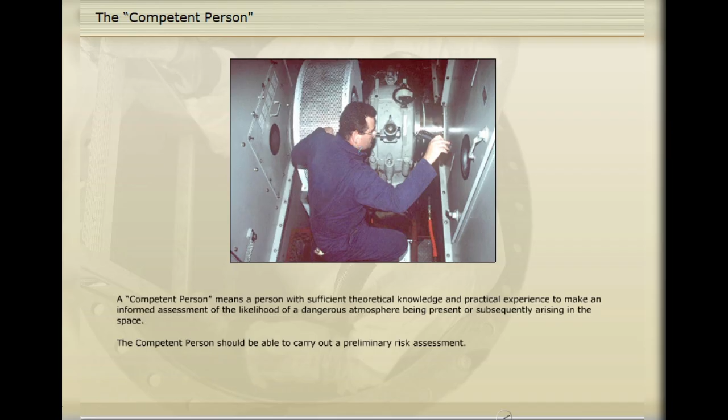The IMO also say that competent and responsible persons should be trained in enclosed space hazard recognition, evaluation, measurement, control, and elimination. The competent person should have both theoretical knowledge and practical understanding of the hazards that might be encountered, in order to be able to assess their likelihood and potential impact, and to define the precautions that will be necessary.

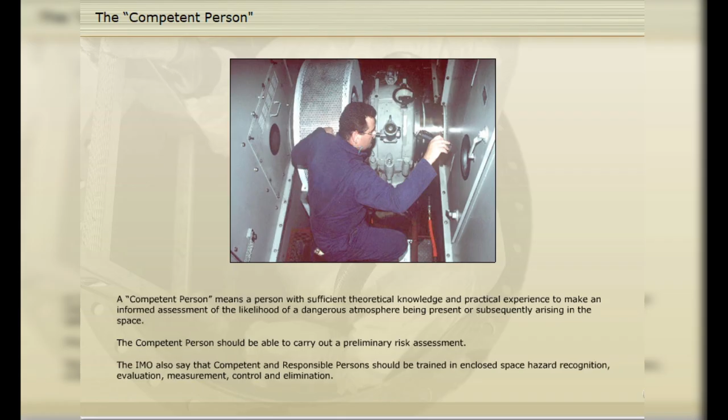With regard to enclosed spaces, the IMO define a responsible person as a person authorized to permit entry into an enclosed space, and having sufficient knowledge of the procedures to be established and complied with on board in order to ensure that the space is safe for entry. The responsible person may be the same individual as the competent person, or may be another person specifically appointed to the task.

The competent person and the responsible person will usually be drawn from ship's personnel, but may, under certain circumstances, be appointed from shore. Superintendents, safety inspectors, dockyard managers, and repair specialists may all assume such duties, and in these cases it is essential that all personnel involved are aware of the identity of the responsible person in particular.

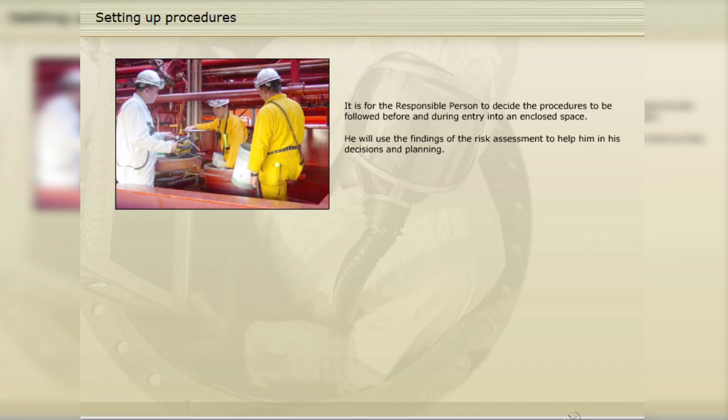It is for the responsible person to decide the procedures to be followed before and during entry into an enclosed space. He will use the findings of the risk assessment to help him in his decisions and planning. The exact procedures will depend on whether the assessment shows there is minimal risk to the life or health of a person entering the space then or at any time in the future; there is no immediate risk to health and life, but a risk could arise during the course of work in the space; or the risk to life or health is significant or immediate.

Click on the risk situation for more information.

Where the assessment shows that there is minimal risk to the life or health of a person entering the space, then routine safety and documentation procedures will be followed.

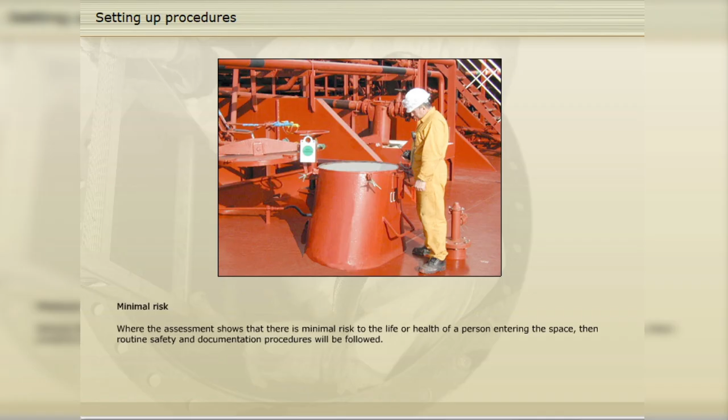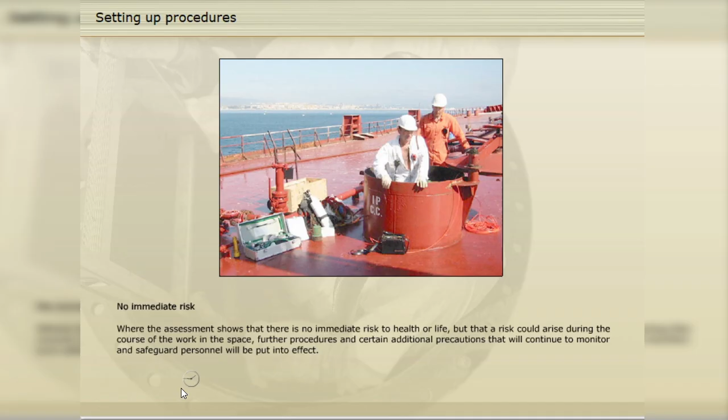Where the assessment shows that there is no immediate risk to health or life, but that a risk could arise during the course of the work in the space, further procedures and certain additional precautions that will continue to monitor and safeguard personnel will be put into effect.

The competent person and the responsible person: small vessels or those with small crew complements may not have the resources to designate either the competent person or the responsible person. In such cases, these positions will normally be filled from shore. In these circumstances, no entry into a potentially dangerous space should be made until a suitably qualified person is available to fill each role.

The 12,573 gross registered tons U.S. flag tanker William T. Steele was preparing to load a cargo of benzene at Guayanilla, Puerto Rico. Unfortunately, due to a planning oversight in the manifold rigging, the cargo was inadvertently loaded into the wrong tank, number 9 centre, which had been reserved for a cargo of xylene.

There was no chance of working with the wrong stowage, so the benzene was transferred out, and number 9 centre was washed and ventilated. Two crewmen entered the forward end of number 9 centre to insert an isolation blank in a flange in a pipeline, and the chief officer went to the after part of the tank to eject water from the sump area. The two crewmen working forward were unaware of the presence of the chief officer. When the flanges in the line were cracked, benzene began to leak out, and the fumes forced the two crewmen to leave the compartment without completing their task.

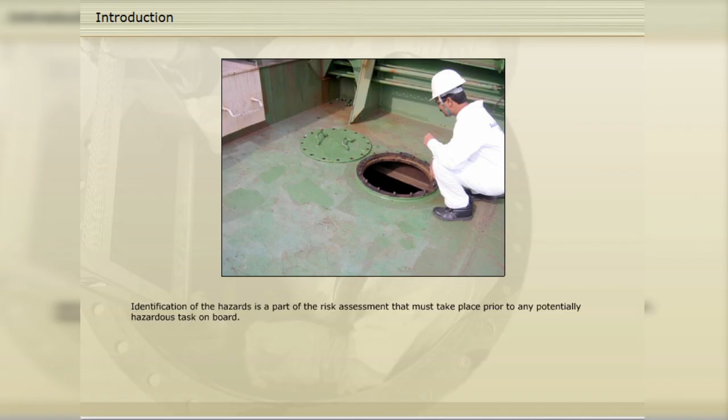Is a part of the risk assessment that must take place prior to any potentially hazardous task on board. The risk assessment should seek to establish the hazards that are or will be present at the work location, and then identify the significant risks arising out of the activity.

For each potential danger, the competent person must assess the likelihood of its occurrence and the severity of harm should it occur. Those at risk should be identified, as should the way in which they are at risk. A calculated judgment of whether the risk is tolerable is required. Consideration should be given to the effectiveness of existing controls and whether they need modifying or supplementing.

The principal hazard associated with an enclosed space, as we have already established, is the atmosphere inside. We will first examine various elements that may be present within that atmosphere and the specific hazards they present to anyone entering the space. Then look at additional hazards that may have a significant bearing on the task to be carried out.

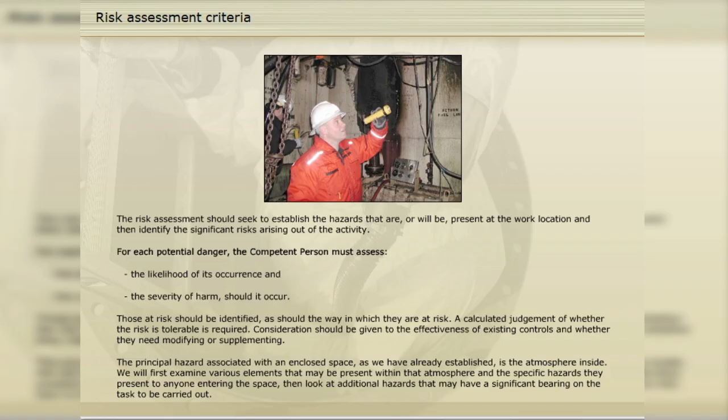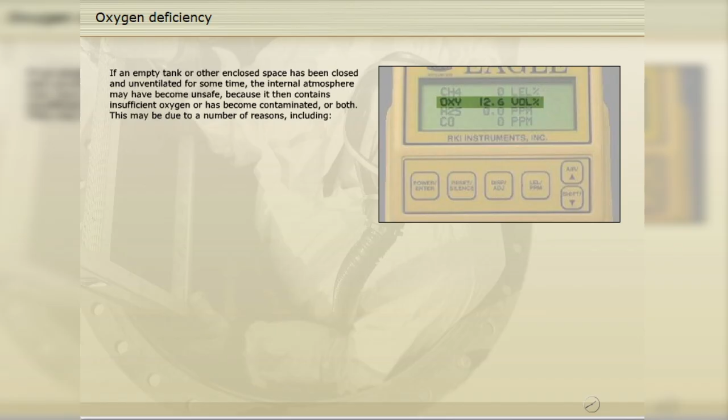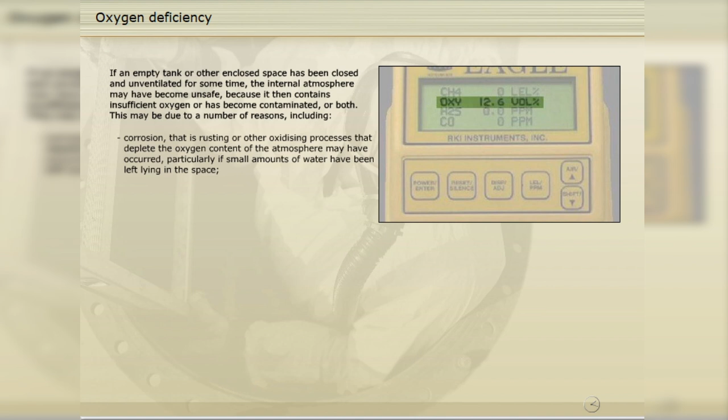If an empty tank or other enclosed space has been closed and unventilated for some time, the internal atmosphere may have become unsafe, because it then contains insufficient oxygen, or has become contaminated, or both. This may be due to a number of reasons, including corrosion, that is, rusting or other oxidizing processes that deplete the oxygen content of the atmosphere, particularly if small amounts of water have been left lying in the space. Oxygen-absorbing chemicals may have been present. Oxygen-absorbing cargoes may have been carried.

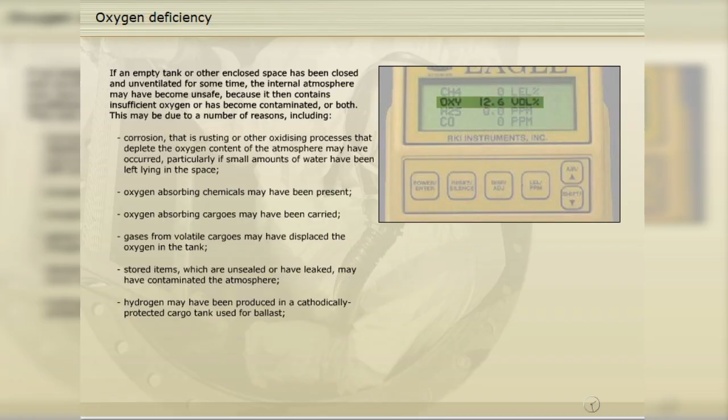Gases from volatile cargoes may have displaced the oxygen in the tank. Stored items, which are unsealed or have leaked, may have contaminated the atmosphere. Hydrogen may have been produced in a cathodically protected cargo tank used for ballast. Oxygen may have been displaced by the use of carbon dioxide or other fire-extinguishing agent. Inert gas may have been introduced into the space.

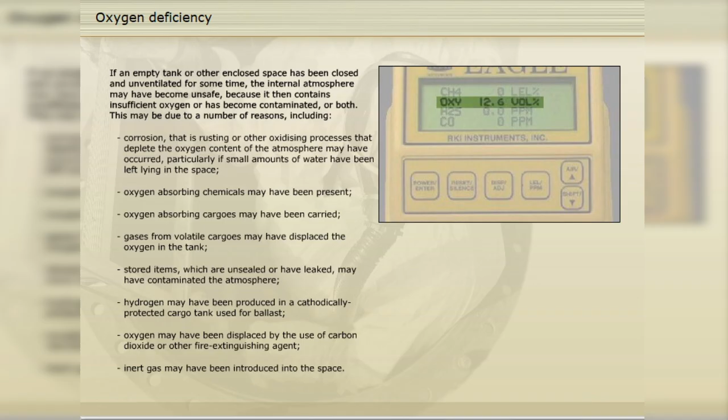It is not just oil, however, that presents a toxicity risk. Other vessels may be similarly exposed, due to the nature of their trade. Click on the labels for more information.

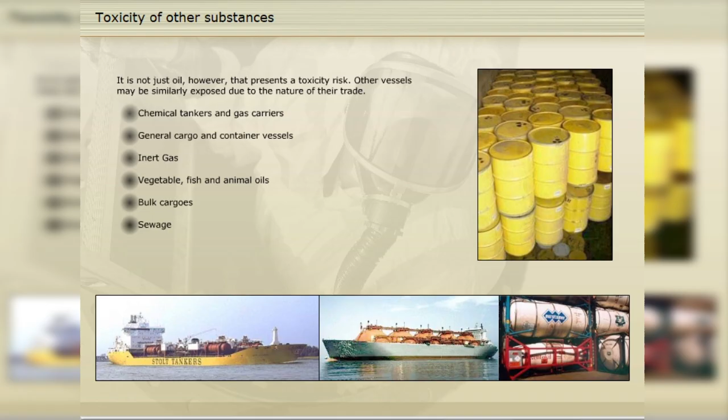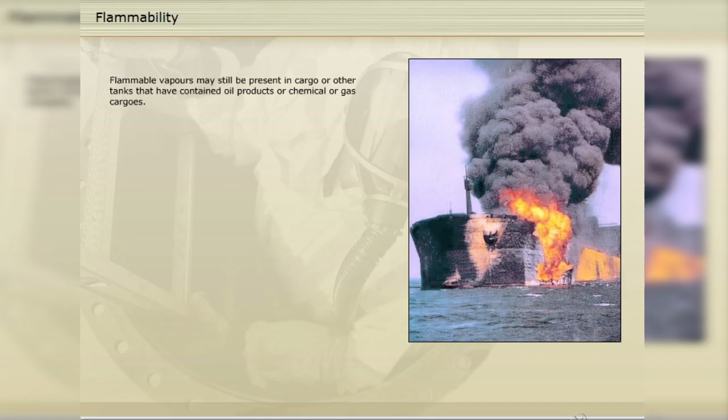Flammable vapours may still be present in cargo or other tanks that have contained oil products or chemical or gas cargoes. Pump rooms and cofferdams, duct keels and other void spaces adjacent to cargo, fuel and slop tanks may also contain flammable vapours in the event of leakage between the compartments or from equipment in those spaces.

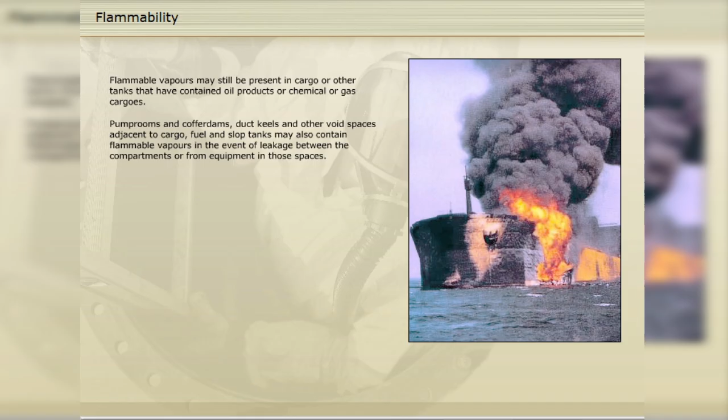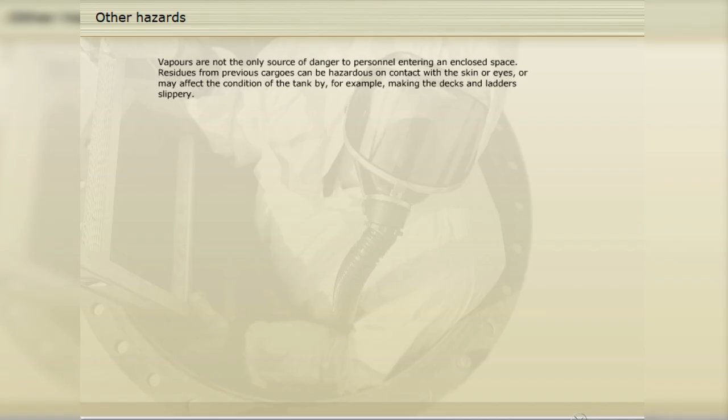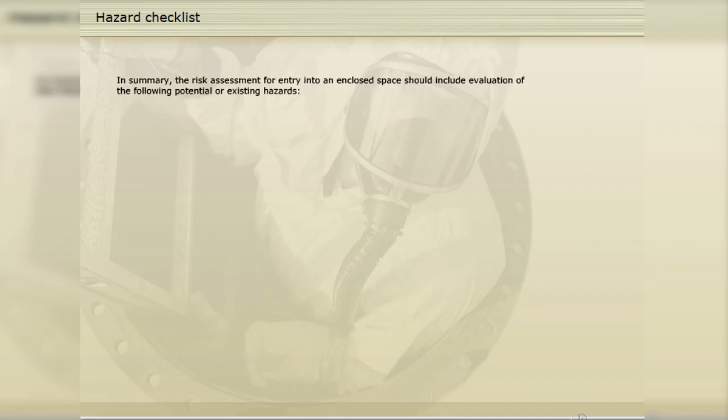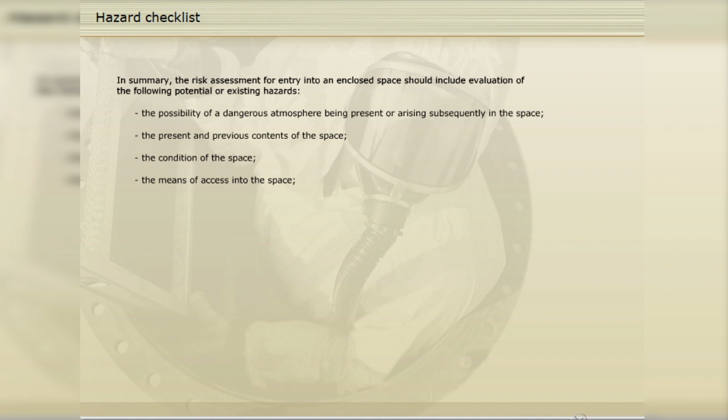In summary, the risk assessment for entry into an enclosed space should include evaluation of the following potential or existing hazards: the possibility of a dangerous atmosphere being present or arising subsequently in the space, the present and previous contents of the space, the condition of the space, the means of access into the space, the nature of the proposed task in the space.

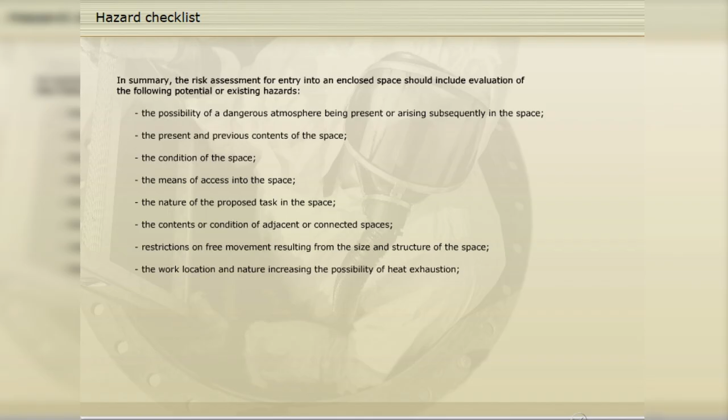The contents or condition of adjacent or connected spaces, restrictions on free movement resulting from the size and structure of the space, the work location and nature increasing the possibility of heat exhaustion, the effect of poor illumination, any limitations on communications, the impact of weather, sea state, etc. on the operation, constraints on and resulting from any other operations going on at the time, and any other relevant influences and factors.

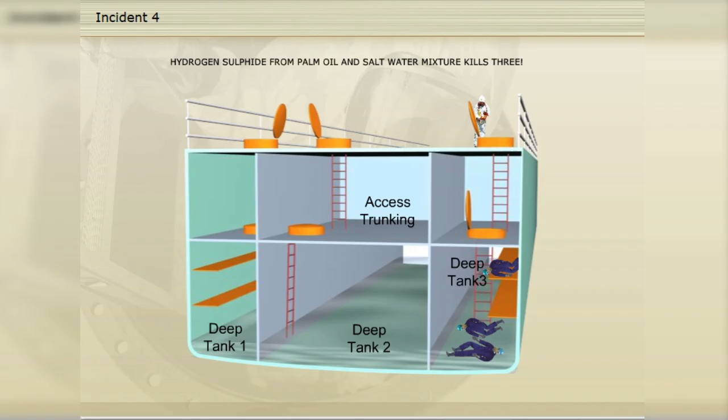This incident occurred on a tween-deck dry cargo vessel which was fitted with several deep tanks designed for the carriage of vegetable oil cargoes. She was on a return run to Europe, having called at various small island ports in the South Pacific where she had loaded palm oil in several of the deep tanks.

Access trunks led from the main deck on each side between number 1 and number 2 hatches to lobbies at tween-deck level. In each lobby, there was a bolted manhole cover at the top of the appropriate deep tank. The deep tanks were protectively coated and fitted with stainless steel heating coils to maintain the cargo temperature during the voyage and to raise it prior to discharge.

The palm oil was discharged in Hull, England, and the tanks were subsequently ballasted with seawater for the next passage to the South Pacific. No cleaning was done after the discharge of the palm oil, and the ballast was loaded directly on top of the remaining palm oil residue.

Some 10 to 12 days into the voyage, a crewman was taking routine tank soundings when he noticed a bad smell emanating from the sounding pipes for number 2 and number 3 deep tanks. This was not unusual and regarded as a normal feature of the carriage of ballast water in these tanks, but he did report the matter to the chief officer.

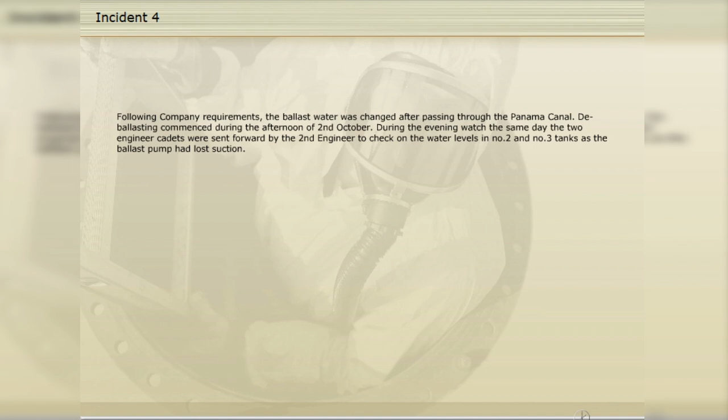Following company requirements, the ballast water was changed after passing through the Panama Canal. Deballasting commenced during the afternoon of the 2nd of October.

During the evening watch the same day, the two engineer cadets were sent forward by the second engineer to check on the water levels in number 2 and number 3 tanks, as the ballast pump had lost suction. The cadets first checked number 2 tank by going down the access trunk to the tween-deck level and opening a steel screw-down inspection port in the manhole lid. Having established that the ballast seemed to be out, they re-emerged and opened the door of the access trunk to number 3 tank and the pump room.

Here they found a foul smell of such strength that they decided it was unsafe to enter, and reported back to the second engineer. On the assumption that all the ballast water was out, both tanks were reballasted with clean seawater. After reballasting, however, the smell from the air pipes of both tanks did not improve.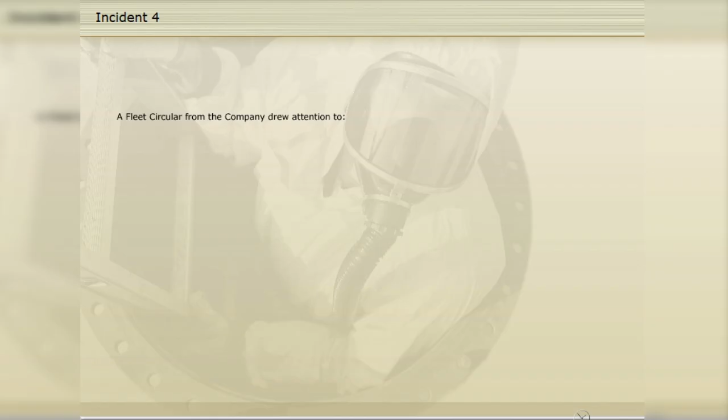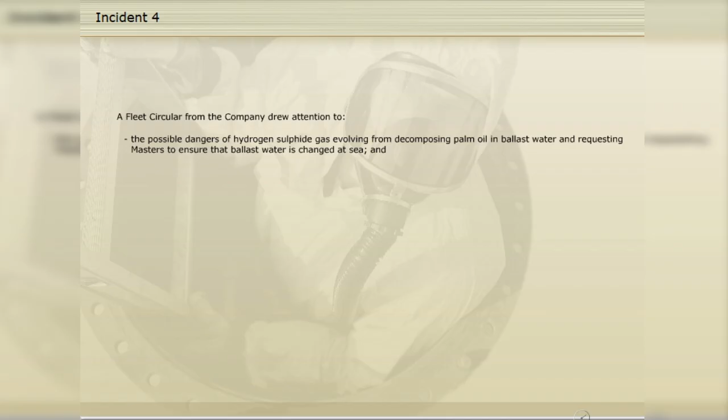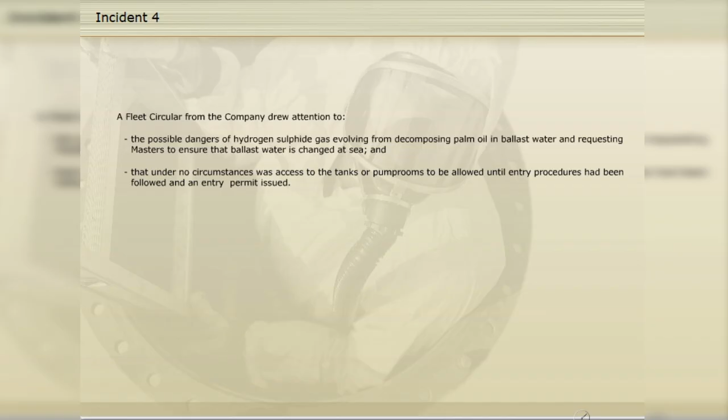A fleet circular from the company drew attention to the possible dangers of hydrogen sulfide gas evolving from decomposing palm oil in ballast water, and requesting masters to ensure that ballast water is changed at sea, and that under no circumstances was access to the tanks or pump rooms to be allowed until entry procedures had been followed and an entry permit issued. The circular had reportedly been discussed on board at a recent safety meeting, but this had not been minuted.

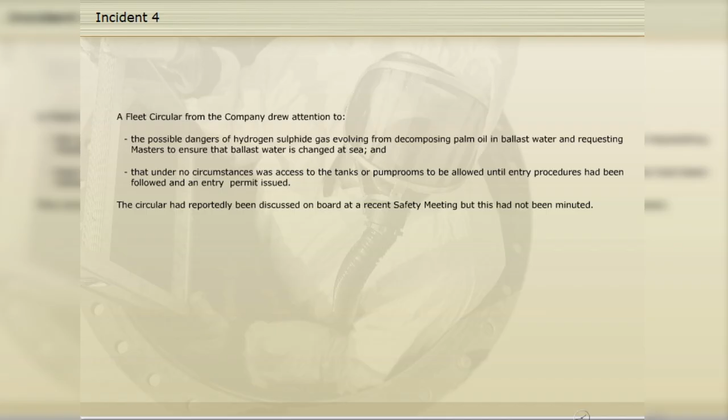A number of tanks were emptied and cleaned as the passage progressed. On the morning of the 21st of October, the chief officer asked the second engineer to pump the ballast out of number 2 and number 3 tanks. Two seamen were instructed to remove the lids from the tanks in the tween deck lobbies.

At about 0700 hours, the Bangladeshi deck serang reported to the bridge to discuss the work for that day. The chief officer anticipated that the two tanks would be empty by early afternoon, and discussed preparations for tank cleaning with the serang. There was evidently some confusion, however, and it is possible that the deck serang had misunderstood when the tanks would actually be empty.

When they turned to at 0800 hours, the deck serang went forward with five men to the tank access trunks. They rigged a hose and prepared a cargo cluster light. The deck serang and one seaman went down the access trunk at the starboard side, leading to the tween deck lobby, where the manhole access to number 3 deep tank had been opened earlier. The deck serang entered the tank.

Almost immediately, the seaman at the manhole shouted up the access trunk, 'Serang fall down!' He then entered the tank himself, and the other men on deck heard him calling, 'Serang, serang,' from inside the tank. Then it went quiet.

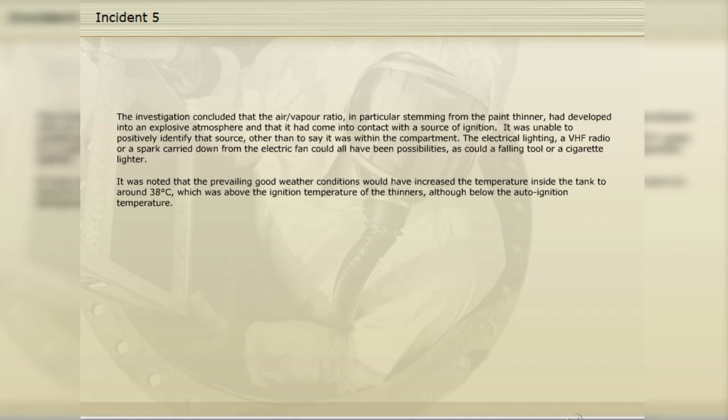It was noted that the prevailing good weather conditions would have increased the temperature inside the tank to around 38 degrees Celsius, which was above the ignition temperature of the thinners, although below the auto-ignition temperature.

Analysis of the rate of delivery of fresh air revealed that it was insufficient to prevent the atmosphere entering the flammable range, and that, not being fitted with a trunking to carry the air to the lower part of the space, only the upper region of the tank was being ventilated.

We've already seen the potential hazards presented by the atmosphere within an enclosed space. We now need to look at test equipment, test procedures, and required readings in more detail.

The readings quoted in this section for safe, unprotected entry into a space are generic minimum readings taken from standard industry regulations and guidelines. If the vessel operates to a safety management system which requires higher or more specific standards, then these should be observed and followed.

There are many models of atmosphere test meters available, although most companies try to standardize across their fleets in order to make supply of parts more streamlined and training on the equipment easier. Click on the labels for more information.

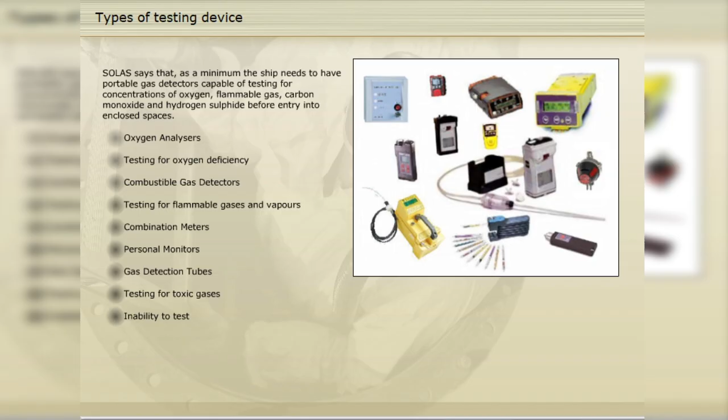Testing of the atmosphere in an enclosed space for the purposes of authorizing entry should only be carried out by persons trained in the use of the equipment and listed as approved operators under the safety management system.

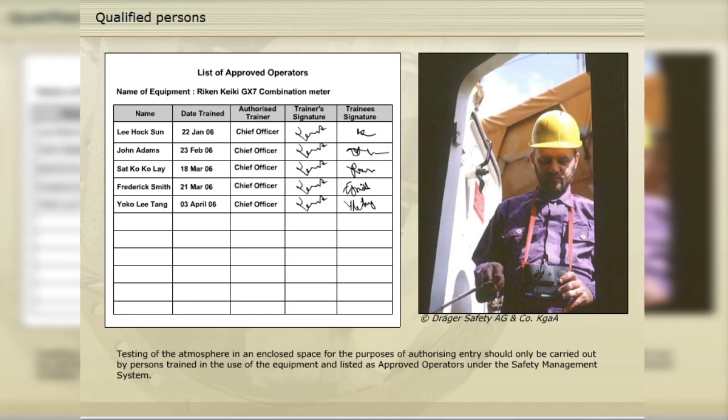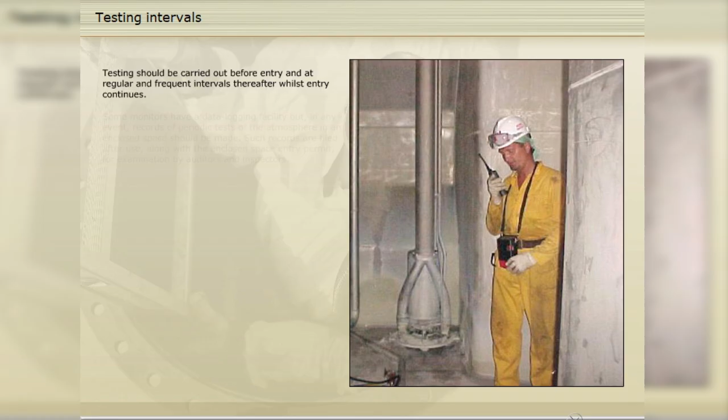Testing should be carried out before entry and at regular and frequent intervals thereafter, whilst entry continues. Some monitors have a data logging facility, but in any event, records of periodic tests of the atmosphere in an enclosed space should be made. Such records are filed after use, along with the enclosed space entry permit, for examination by auditors and inspectors.

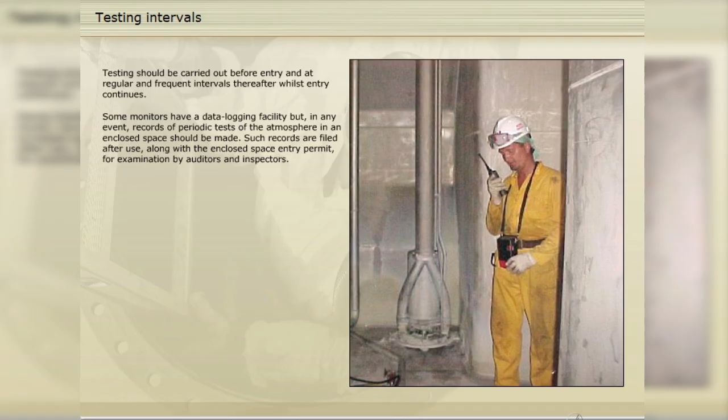If possible, the testing of the atmosphere before entry should be done by remote means. This may be with a fixed probe in a hold or void space, or with an extension line on a portable monitor. This is the safe way to test, in that it does not expose anyone to the additional hazards presented by entering the space.

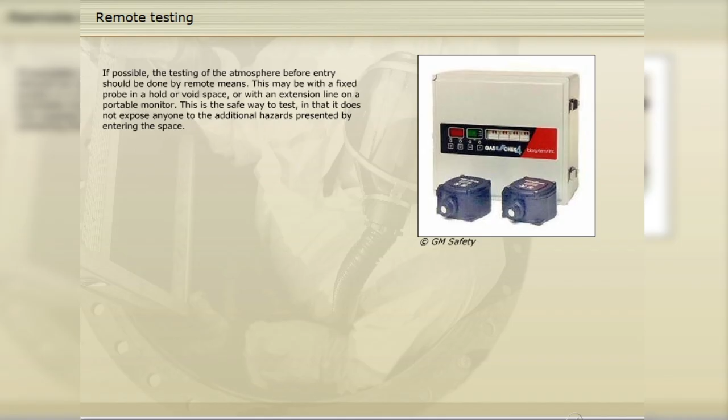Vessels where entry into enclosed spaces is routine or anticipated are usually fitted with or supplied with the appropriate equipment. In some vessels, however, entry into an enclosed space may be an exceptional and unanticipated event, and they may not carry equipment with remote measuring capability.

In this situation, an initial protected entry must take place to carry out measurement within the space, irrespective of the suspected condition of the atmosphere. The person selected to enter the space to test the atmosphere must wear breathing apparatus and rescue harness, and must position themselves only where they can be pulled out in an emergency.

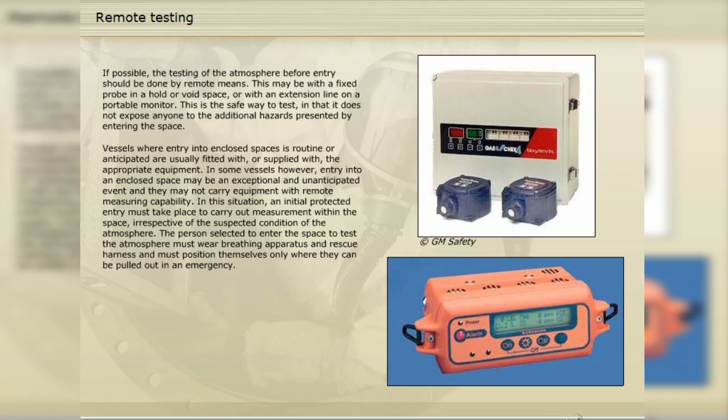On some vessels, it may be that certain spaces are only accessible by passing through another enclosed space, as for example a double-bottom tank, accessed through a manhole in the bottom of a side ballast tank. In such cases, this must be carefully planned and all precautions accounted for. It may be that the operation becomes a two-phase entry, with separate atmosphere test readings and an intermediate station for a second attendant.

If the enclosed space is a cargo tank or hold, it is assumed that cleaning operations are completed and the space has been cleaned to the maximum possible extent, followed by adequate ventilation.

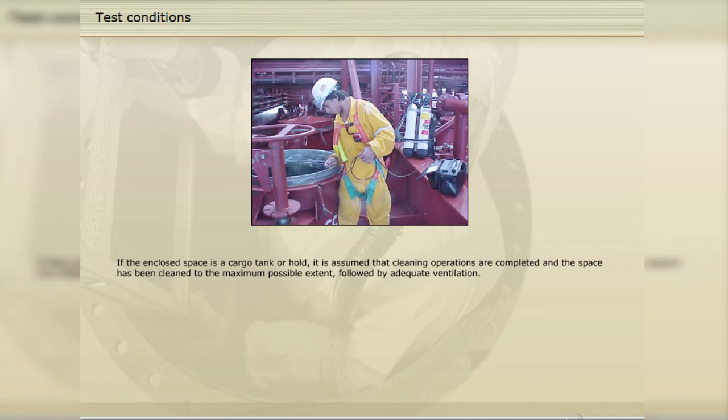The meter used to test the atmosphere should have been purged and zero set immediately before use and allowed to stabilize. Oxygen meters should be zero set in clean, fresh air, not immediately adjacent to the hatch or vent risers, where they may be subject to fumes being expelled from the tank.

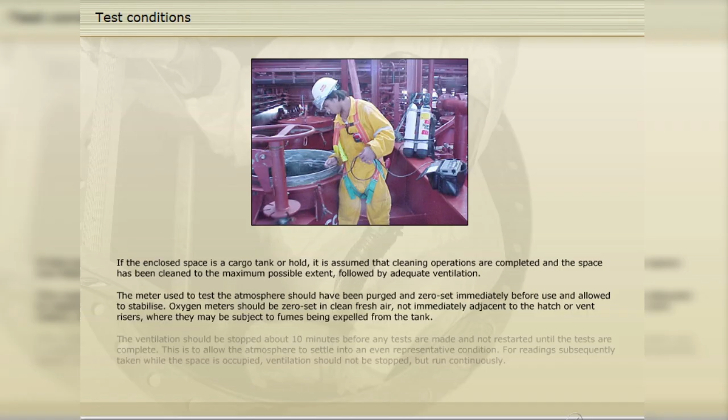The ventilation should be stopped about 10 minutes before any tests are made, and not restarted until the tests are complete. This is to allow the atmosphere to settle into an even representative condition. For readings subsequently taken while the space is occupied, ventilation should not be stopped, but run continuously.

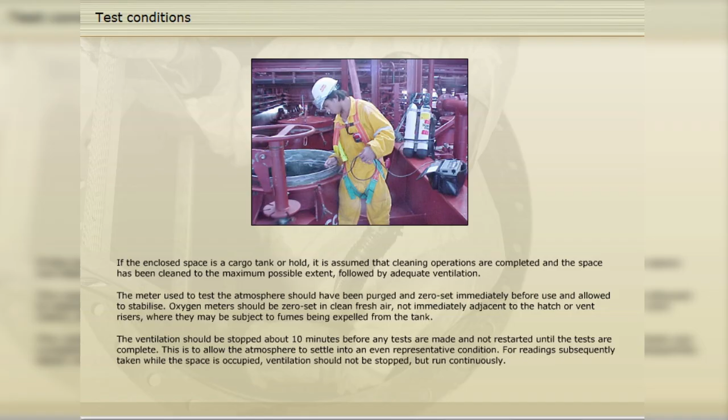Testing must be carried out at different levels and in different sections of the space, thus increasing the possibility of detecting any pockets of oxygen-deficient atmosphere remaining in the space.

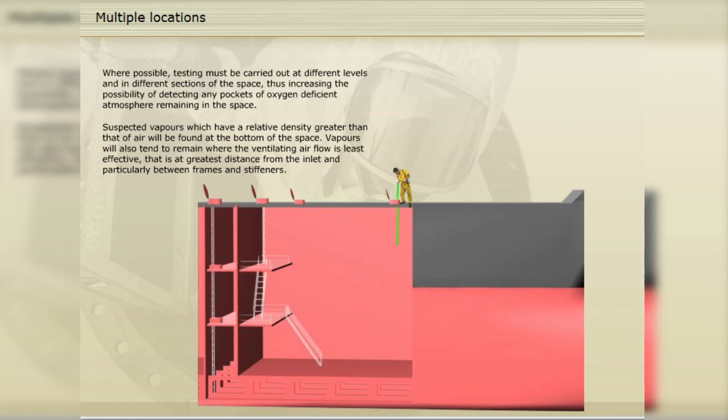Suspected vapours, which have a relative density greater than that of air, will be found at the bottom of the space. Vapours will also tend to remain where the ventilating airflow is least effective, that is, at greatest distance from the inlet, and particularly between frames and stiffeners.

Note that an extension fitted to a portable monitor may require additional steps in the test procedure. Most models today are electronic, but where an air sample is drawn up to an analyzer unit on deck, a longer sampling time may be required to allow fresh air to be purged out of the piping and ensure that an accurate reading is obtained.

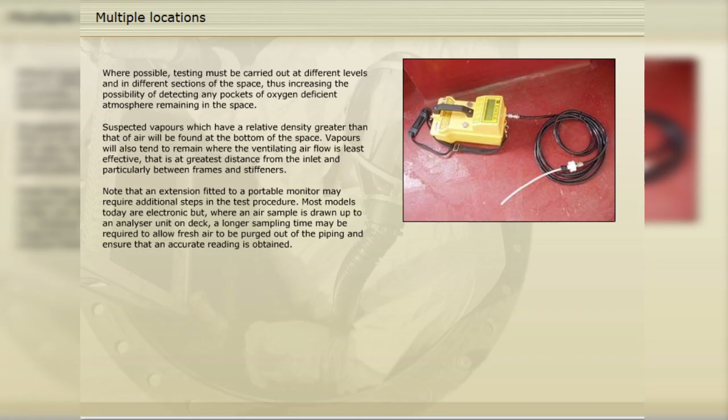Note too that some models are not capable of drawing a sample above a certain height and cannot therefore be used to test the atmosphere in the bottom of a tank from deck.

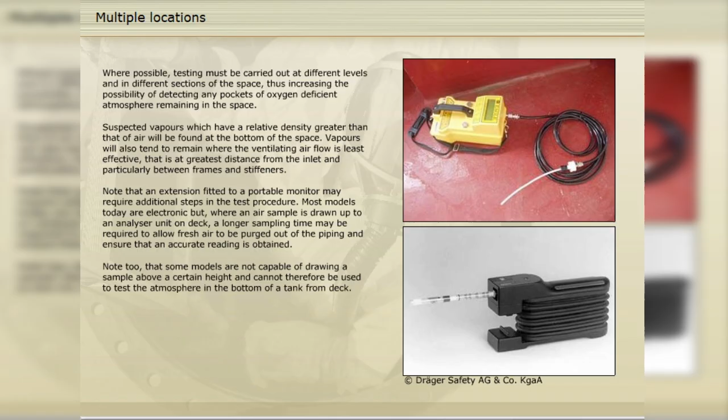When it is required to gas-free a cargo tank on an oil tanker after washing, it should first be purged down with inert gas to reduce the hydrocarbon content to 2% or less by volume, so that during subsequent gas freeing, no part of the tank atmosphere is brought within the flammable range. This additional gas freeing is also needed to remove toxic products introduced with the inert gas.

Direct measurement of trace components of inert gas is not required when that subsequent gas freeing reduces the hydrocarbon concentration to 1% of lower flammable limit or less, in conjunction with a steady oxygen reading of at least 20% by volume, because this is sufficient to dilute these components to a safe concentration.

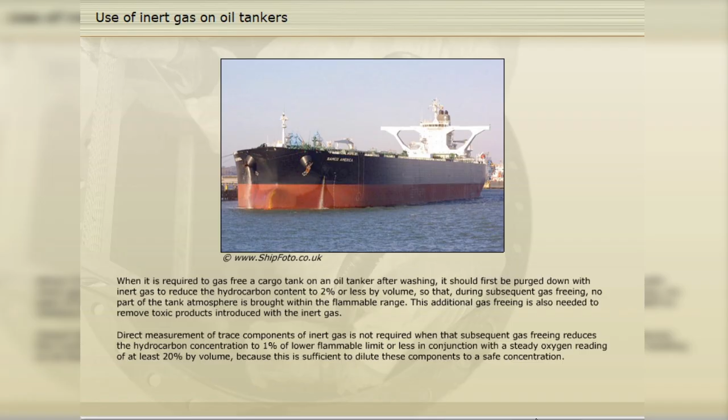On the 4th of September 2001, the chemical tanker Rheinstern was anchored off Rotterdam awaiting cargo orders. Even though there were no instructions, the master decided to prepare the tanks anyway. The previous cargo had been naphtha. Because of the vapour density of the product, the plan was to ventilate the tanks and then eject the cargo residues, collecting them in a slop tank. No water cleaning was planned.

Ventilation was achieved by a flexible large-bore trunking connected to the deck ventilation line and inserted through an adjacent tank cleaning hatch. The trunking was only pushed inside the top of the tank and not lowered down to the bottom. The tank lid was kept only cracked open in order to create a slight back pressure in the space.

In order to eject the tanks, the normal procedure was for a man to enter the tank and put the ejector pump suction hose into the sump, directly under the foot of the deep well cargo pump. The first tank to be ejected was number 8 starboard, and the chief officer tested the atmosphere at around 10:30 hours, recording 15 to 25% LEL and 20% oxygen content.

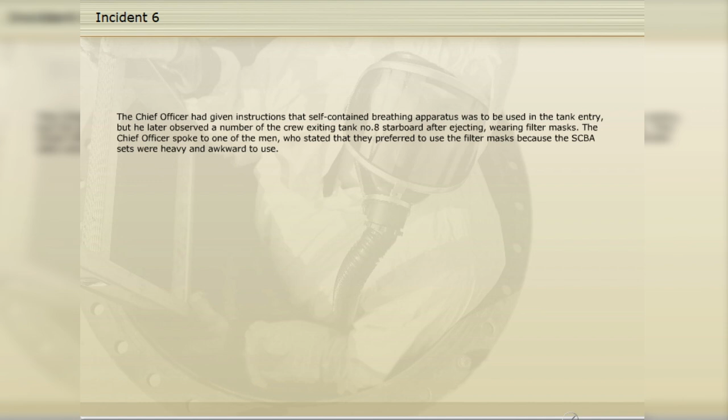The chief officer had given instructions that self-contained breathing apparatus was to be used in the tank entry, but he later observed a number of the crew exiting tank number 8 starboard after ejecting wearing filter masks. The chief officer spoke to one of the men who stated that they preferred to use the filter masks because the SCBA sets were heavy and awkward to use. Work continued through the day, and the chief officer later left the deck to get some rest.

At around 16:35 hours, the crew turned their attention to tank number 6 port. The tank was not tested before entry, the assumption being made that conditions would be the same as in number 8 starboard. The deck cadet had by now arrived on deck and was assigned as watchman. 3 crewmen went into the tank, 1 to place and tend the suction hose, and 2 to squeegee, or sweep any remaining product towards the sump.

At around 16:45 hours, the deck cadet saw one of the men down the tank collapse. He immediately informed the second officer on the bridge, and the general alarm was sounded. The master quickly appeared on the bridge, but, discovering the situation, he went down onto deck straight away. On the way, he met the third officer and instructed him to collect a rescue line and harness from the after-deck store.

Meanwhile, one of the two crew members, still standing in tank number 6 port, left the tank to get a breathing apparatus, while the other crew member stayed with the man who had collapsed. As the man arrived on deck, the deck cadet took the filter mask from him, put it on, and entered the tank himself to take a breathing apparatus set down. Once he had handed it over, he returned to the deck.

By this time, both equipment and men had started to arrive on scene, including the harness, line, and a resuscitator. 2 more men donned self-contained breathing apparatus and went down inside the tank. The harness was lowered and fitted to the casualty, who was then hauled out onto deck. During this recovery operation, the master collapsed on deck.

The second officer contacted the Netherlands Coast Guard from the bridge and requested medical assistance. After some discussion, it was agreed that the Rheinstern should heave anchor and proceed towards the entrance to the port, in order to minimize further delays, and a helicopter would be mobilized.

In the meantime, repeated and prolonged attempts were made to revive the master, and care was administered to the man who had been brought out of the tank. At 18:30 hours, the helicopter arrived bringing a doctor. The master was pronounced dead at the scene. The man who had collapsed in the tank spent the night in hospital ashore, but returned to the vessel the following day.